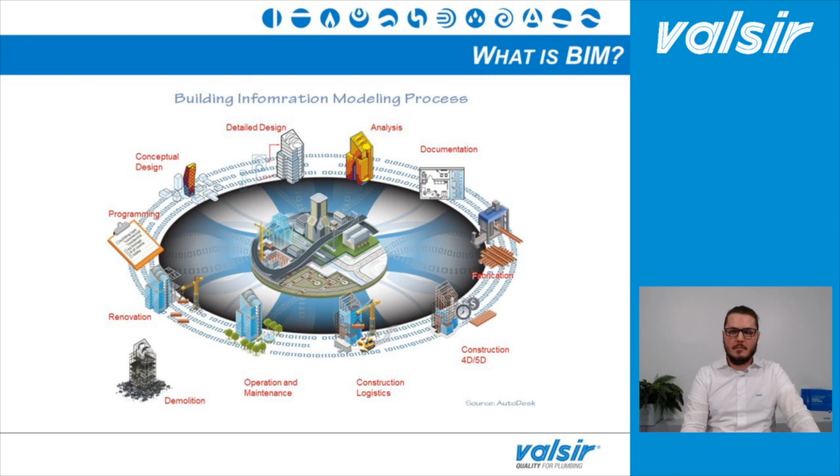By following the BIM philosophy, you try to improve the synergy amongst all the stakeholders involved in the development of a building. In a traditional way of development, you have different professionals who independently develop their project. For example, the structural engineer develops the structural core of the building, and the MEP designer designs all the systems inside the building. But they don't talk to each other, and this can lead to drawbacks during construction, which can lead to delays and extra costs.

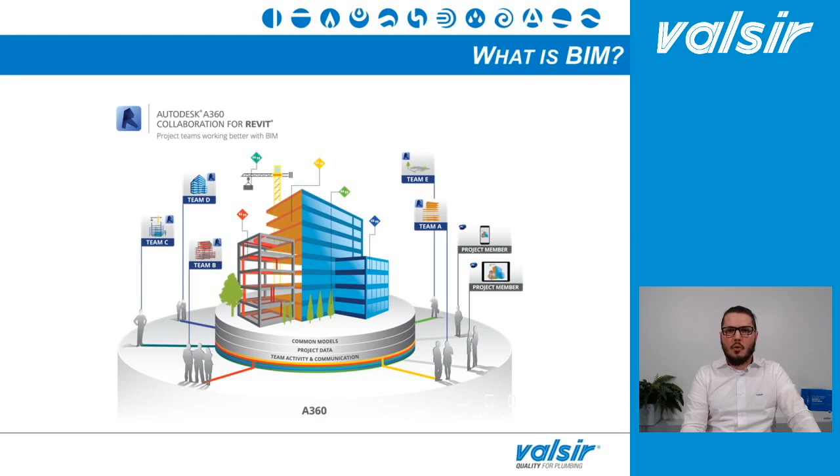But by using a BIM approach, you try to improve the coordination amongst all the stakeholders, and by doing so, you cut off the delays and extra costs, and you can save money.

If we look at both images now, you can see that the entire building is now the center of our development. In a traditional way, we mainly have two-dimensional plan views made by different professionals for different systems - a plan view for the structural engineer, then a plan view for the MEP designer, made mainly with vectorial software, such as AutoCAD from Autodesk. If you overlap all those plan views, you get an imaginary result of your building.

But by using the BIM approach, we now use different, parametric software that allow us to have, in the end, a real digital avatar of our building. And in order to create this digital avatar, you need models to insert into your project. This is where companies like Valsir come in, helping designers by providing these models.

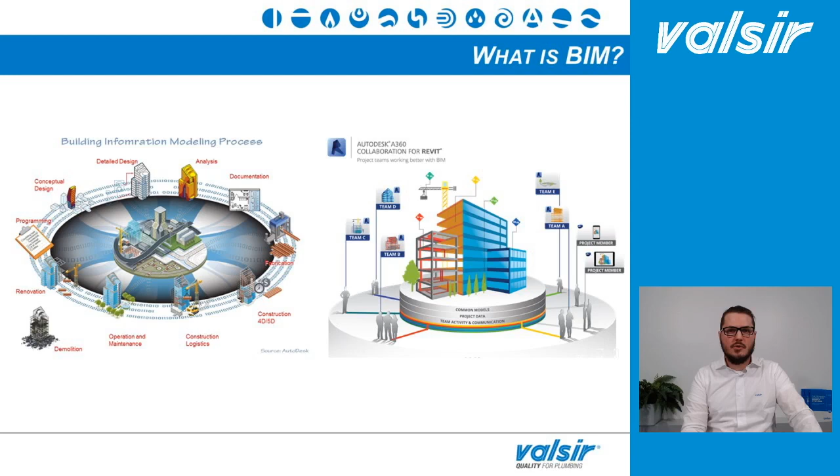So let's take a look at all of Valsir's BIM solutions. Going to our website, www.valsir.it/software, you will find all our solutions for BIM. For those already familiar with BIM, you can see that most of our solutions are mainly for Revit. Revit is a software from Autodesk, and it is the most used software in our market share for MEP designing. So we decided to develop most of our solutions for this software.

As you can see, we have another solution for another software, Plancal Nova, because we always keep an eye open on market requests. The first solution is an entire range of families for Revit. We have all our product families in Revit for your project, and we started developing those families in 2014. We develop all the models internally in order to achieve two main advantages: first, to provide clients a fast and quick response for any question or problem using our models, and second, to keep all our products in the catalog up to date.

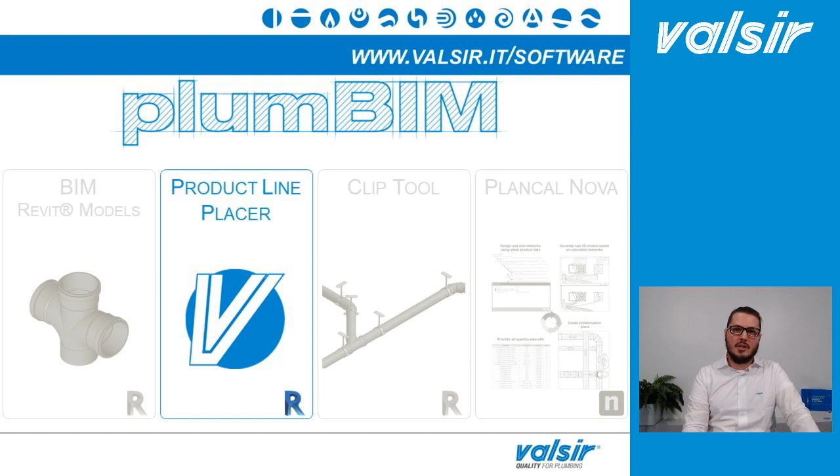The second solution we have is a tool for Revit called Product Line Placer. It allows you to insert directly inside your project all the system and loadable families without loading them one by one as you would in a traditional way. This will be a topic of the next webinar about Valsir solutions for BIM, hosted next week by my colleague Engineer Donati.

The third solution is another tool for Revit called Clip Tool. We decided to develop this solution because, thanks to feedback from users of our families, we found out that in their designs, for example for a waste system, all the pipes were flying inside the project. That's because the bracketing system was missing, and adding a clip around the pipe is a really hard and time-consuming process. So to help them, we decided to develop this tool that automatically inserts all the bracketing system inside your project. This tool will also be a topic of the next webinar, so stay tuned if you're interested.

The last solution, as already mentioned, is for another software, Plancal Nova, where we developed an entire range of families for this software. Unfortunately, this won't be a topic of this series of webinars, so if you have any questions about it, feel free to contact us and we'll be glad to answer and provide all the information you need.

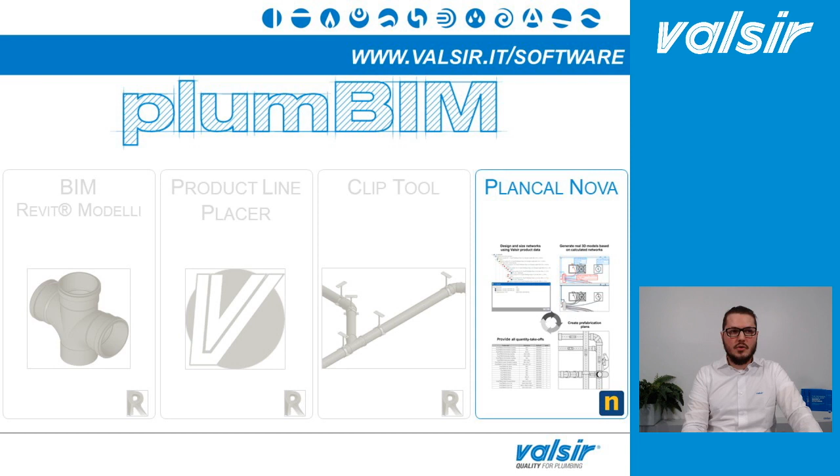So now let's focus on the first solution, our Revit models. We mentioned that in order to create the digital avatar of the building, we need models, and the same goes for MEP designers to design their systems. They have two different solutions: they can use the standard models developed by the software house, or they can use Valsir models. Let's do a quick comparison between those two categories.

If we look at ease of use, both get a positive evaluation. With standard models, you can create an entire full system without any problem, because the software house developed their models to give you a full user experience with their software. We developed our models taking the positive aspects of standard models to provide you the same user experience, so with Valsir models you can also create a complete system without any problem.

But if we go deeper into the comparison, we can see that with a standard model, there's no matching with a real item, because it's a digital item developed by the software house just to give you a complete user experience—you don't have anything more. But with our Valsir models, you have a matching with a real item, because you're sure that if you insert a product from our families, you're inserting a real product that you'll find on the market. This allows you to have a complete list of all the products you've inserted.

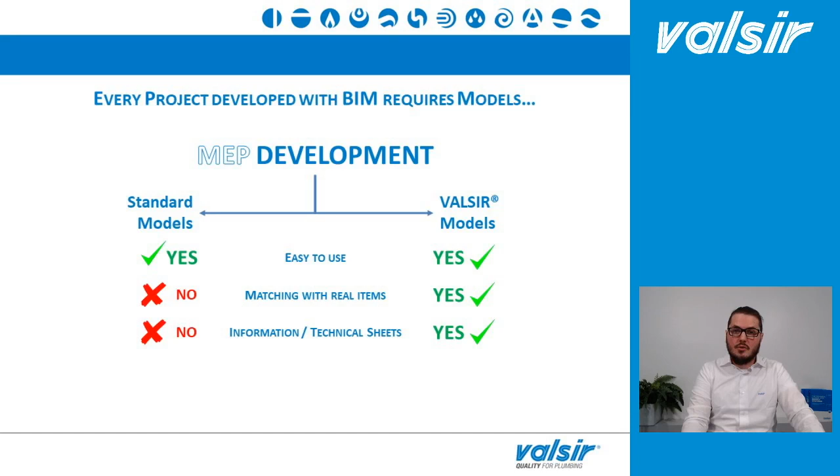And since we're using a real item, we also have a lot of different technical and commercial information attached. So you have a sort of full technical sheet for all the products you've inserted in your project—things you don't have with a standard model, because it's just a digital item developed by the software house.

Using a real product also allows you to do what's called clash detection. By using a standard model, you're not sure about the real dimensions of the actual item that will be installed on site during the construction phase. But with Valsir models, you're sure that the geometry and dimensions of the digital item match the real product, so you can also check for any interference between the system and the main structure, for example, and avoid delays in solving this kind of problem.

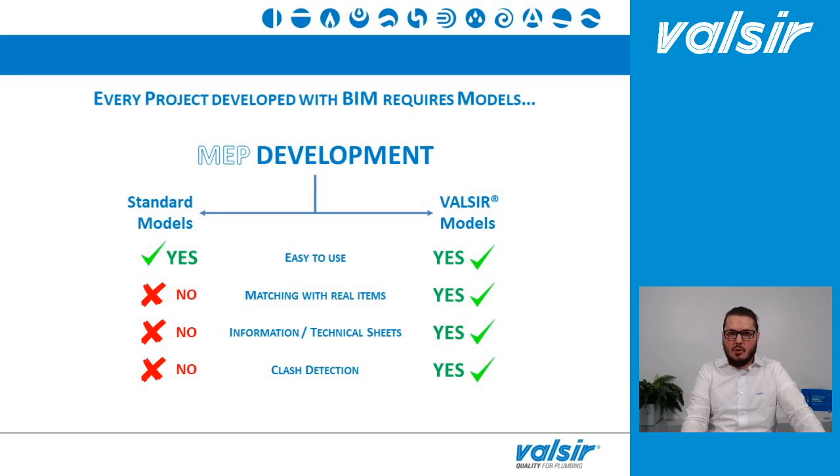Now let's go deeper into which kind of information you'll find in our models.

As already mentioned, we have a really high level of detail in the real geometry of the item, so you can be sure the dimensions of the digital item match the real product. We also have a list of information, because BIM means Building Information Modeling. We have commercial information such as the commercial name and product code, but also technical information like the field of application or the noise level you can achieve, for example here looking at a wastewater fitting, or the limit of pressure and temperature, and so on.

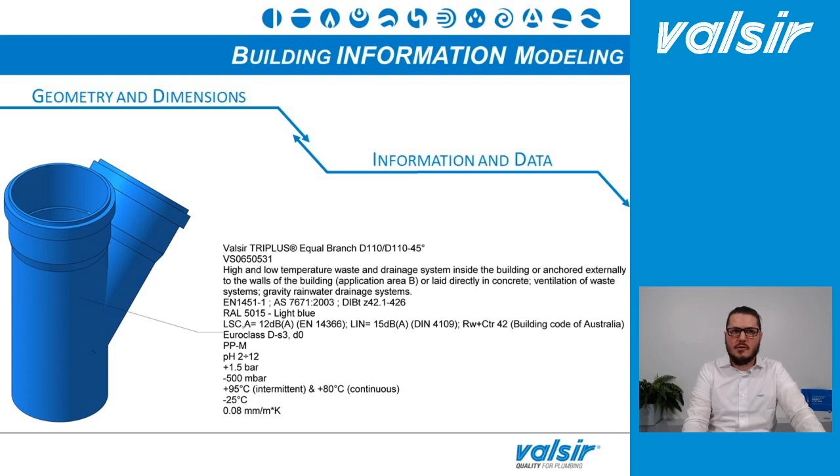But it's not only that. BIM means Building Information Modeling, so more information is better. If we look at this hydro fitting, which is for water supply, we have the same information as before, but if you look at the last two rows, you find additional information.

In this case, it's information about the tools needed to install this particular fitting. Following a BIM approach, we have to consider the entire life cycle of the building, including the maintenance phase. Once you have the as-built of your construction, you can give the digital avatar of your building to the maintenance manager, who can check the products in the system to know which tools are required to maintain the building.

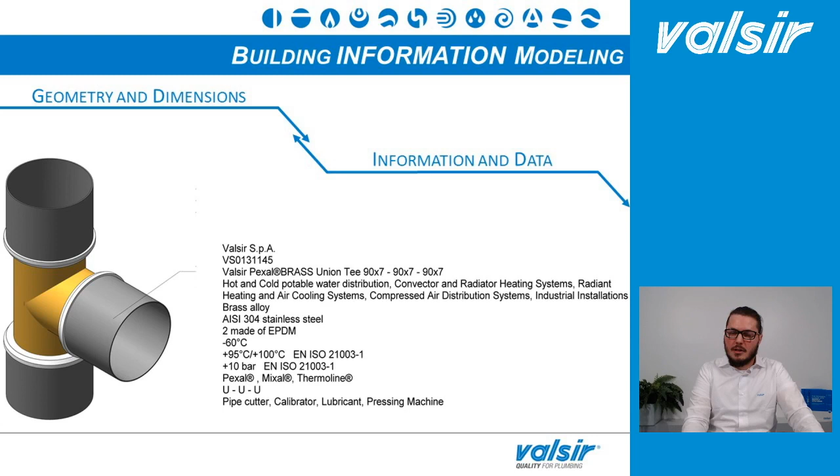For example, for the flushing cistern we can change the depth of installation, the length and angle of the waste pipe, the length of the legs of the flushing cistern, and so on.

Inside our families we also have a lot of presettings to optimize it, such as preset schedules of materials, preset routing configurations, and so on.

We are now going to see a couple of videos about this topic. The first one is about our editable parameters. We are inside the Revit environment, with three different views: a plan view, a sectional view, and a 3D view.

We've just inserted our flushing cistern, and on the right you can see all the different properties and editable parameters of this fitting. Now we're changing the host distance input, which is the depth of installation. This way we can optimize the thickness of our wall, which is important because you can adjust it according to the real installation.

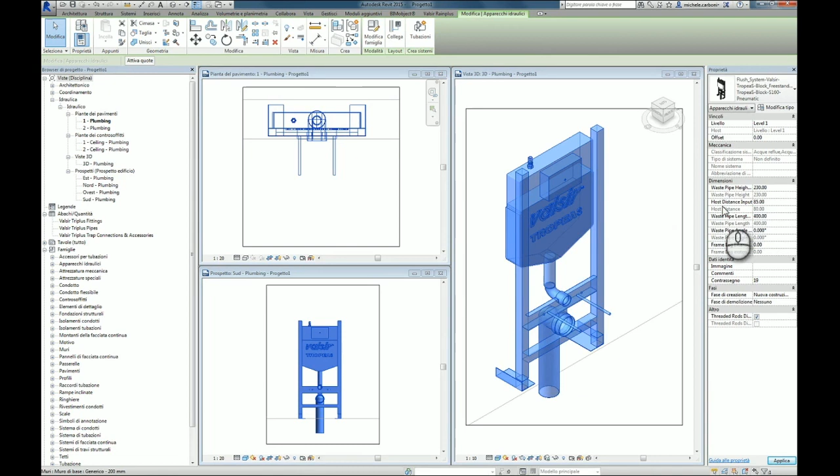If you think about a particular installation of a flushing cistern, like a back-to-back toilet, it's important to know how to optimize the model to also optimize the thickness of the wall. Similarly, we can change the angle and length of the waste pipe, checking if the waste system will fit inside the slab. Another thing we can change is the length of the legs to reach, for example, the structural slab in our project.

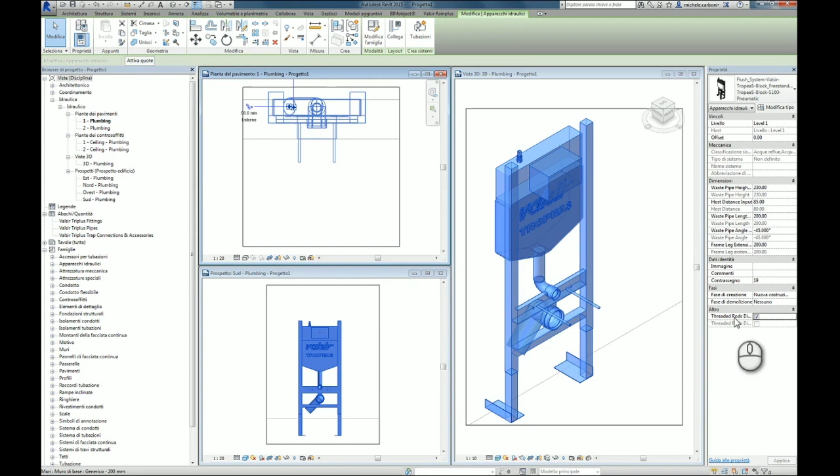When we finish optimizing the model, with just a couple of clicks we can start designing the waste system, drawing the pipes. As you can see, by drawing the pipes we are adding fittings and pipes to our project.

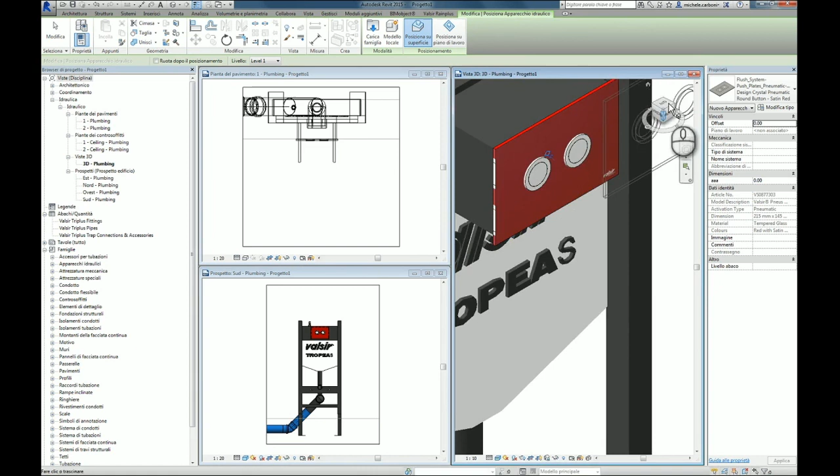Another thing we can do is add accessories, for example adding the pushing plate to our flushing system. We have a complete catalog of pushing plates, including design pushing plates. This way you can also add an aesthetic touch to your project, useful for interior designers who need to provide a render of the bathroom to their clients.

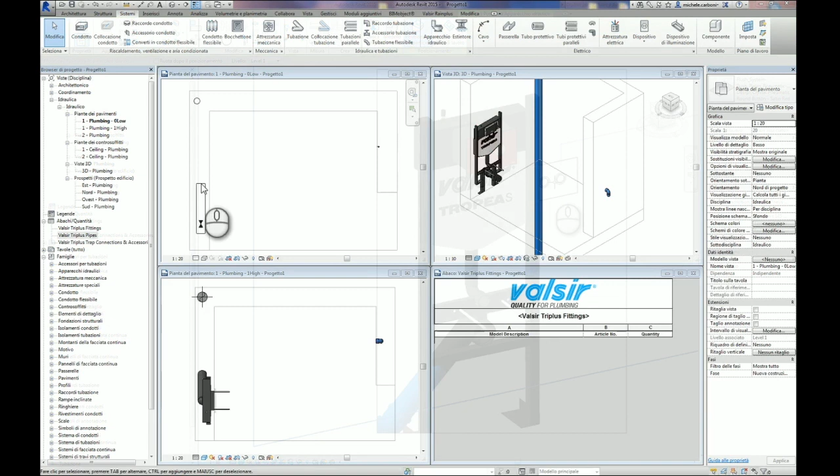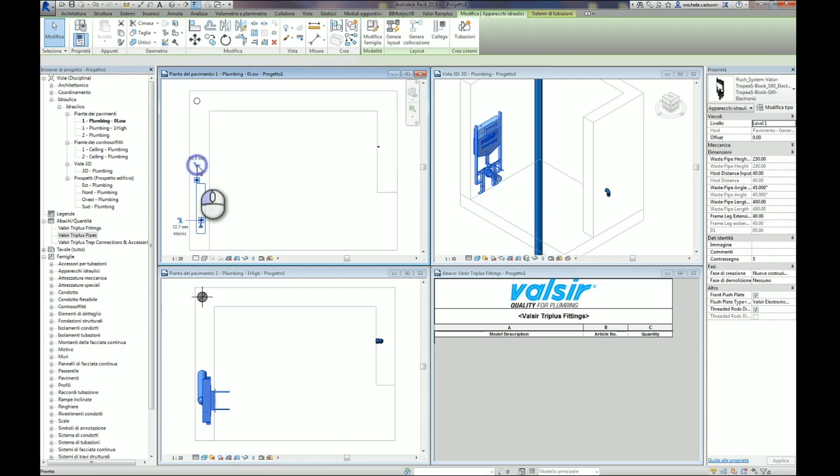Speaking about the setting, we are now going to see another video. We are still in the Revit environment. We have 4 views this time: a plan view schematic, a plan view detailed, a 3D view, and in the bottom right a 4th view, which is the schedule of the material, because in Revit the list of materials is also a view.

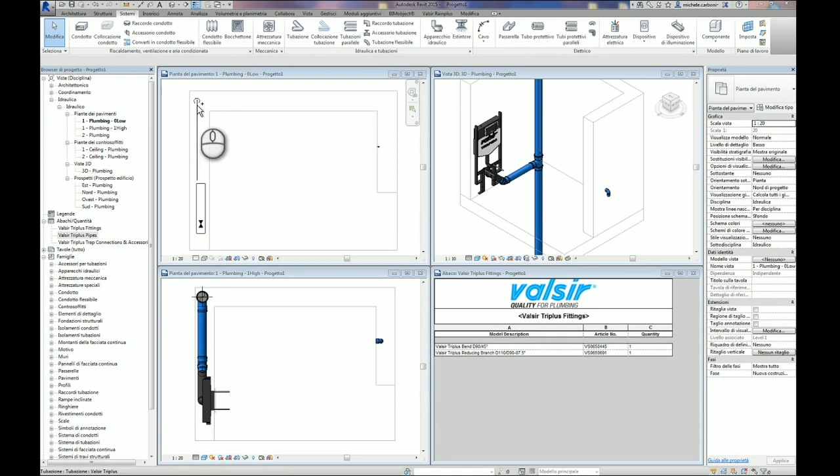So now we will see that simply by drawing a 2-dimensional line in the schematic view, we are adding pipes and fittings to our project. This is thanks to the routing preferences that we have already preset in our families to optimize the way you design your system. Differently from a vectorial software, where drawing a line gives you no information, in a BIM software, a parametric software, by changing parameters, when you draw a line you are drawing a real item, a real product.

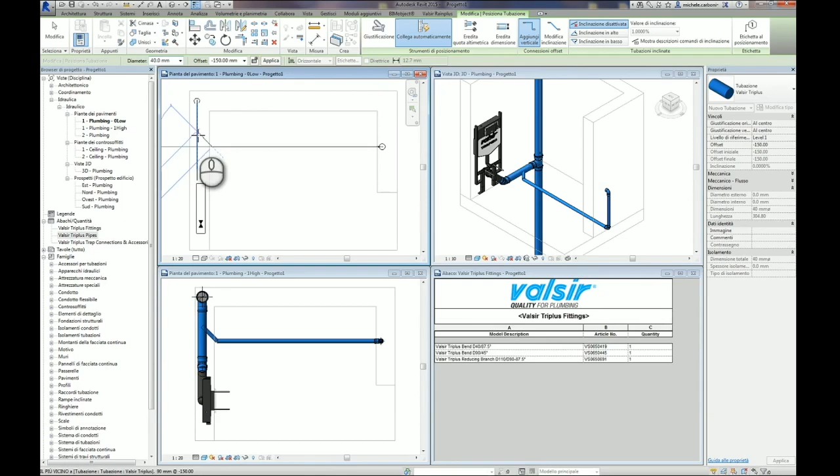We are doing the same now from the spigot bend. As you can see, by simply drawing 2 lines, we are drawing fittings, pipes, and everything. As you can see, while we were drawing the pipes, the schedule of the material updated with all the items in our project. So with just a couple of clicks, we are adding real items, real products.

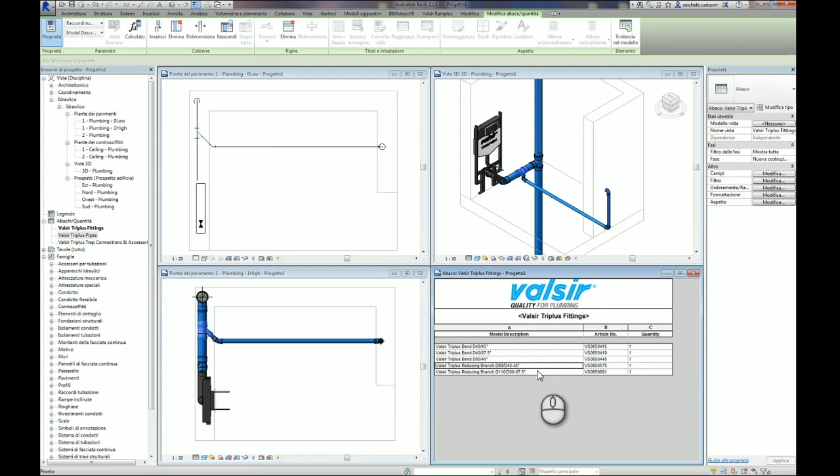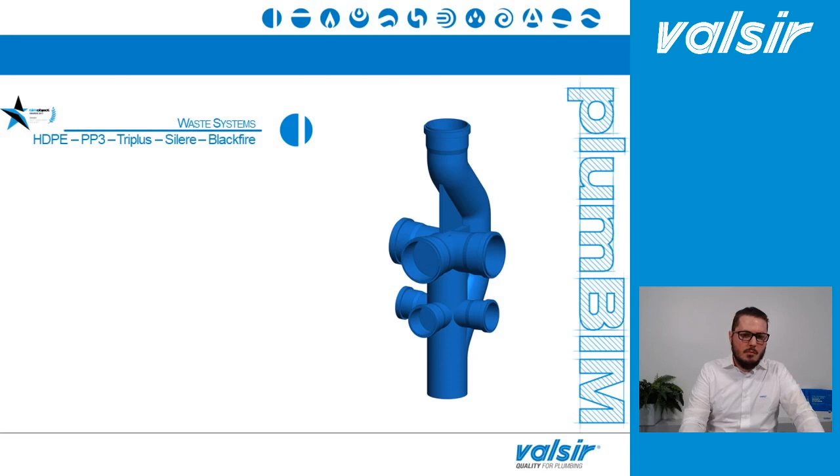But what do we have available for you in Revit? We have our entire range of waste systems: our HDPE pipe, weldable HDPE pipe, and also all our push-fit pipes for acoustic application. And we have also the new entry, the Blackfire, which is our pipe for fire application.

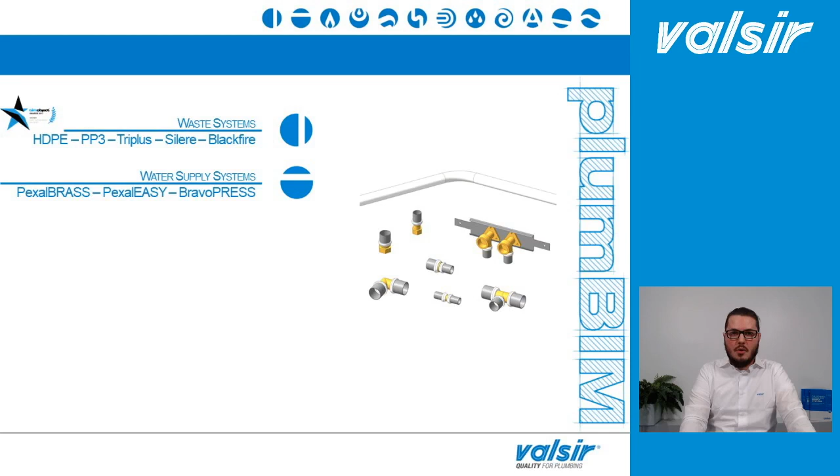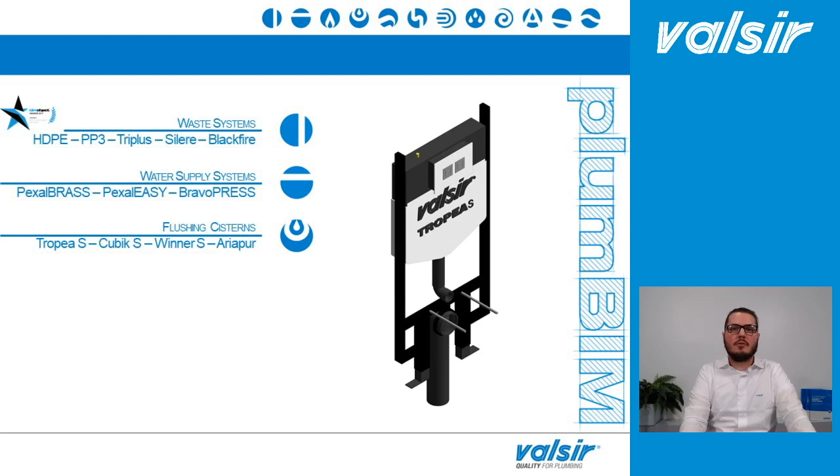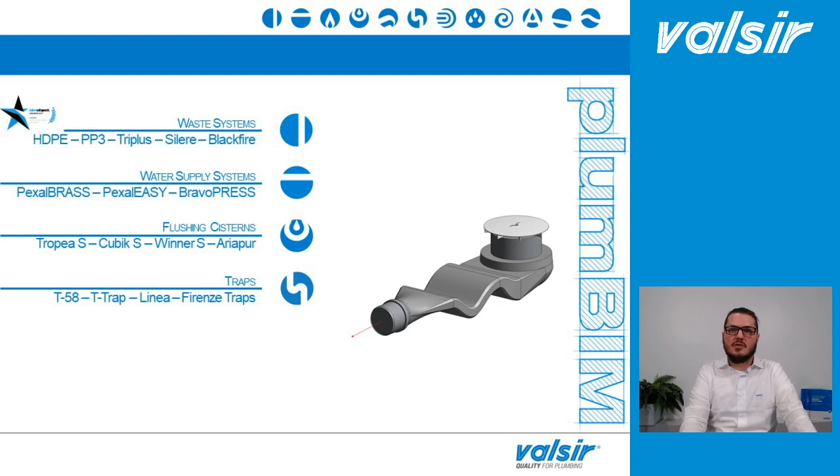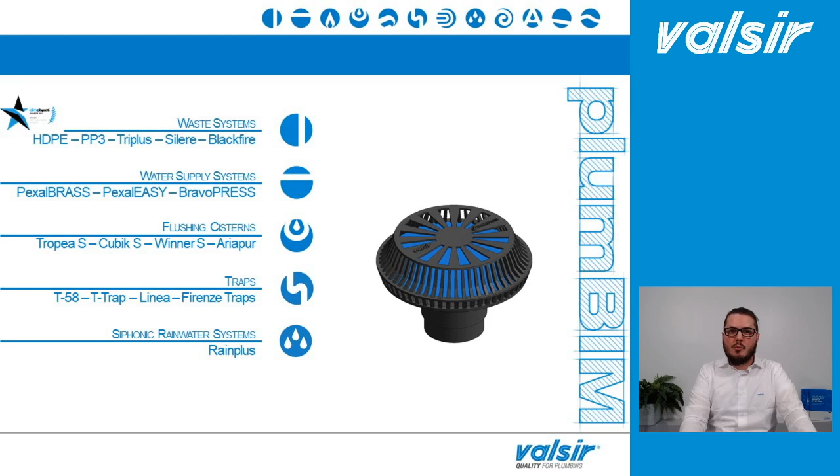Then we have a complete range of families of traps, standard traps for standard application, or even design traps, the same as for the flushing plates, to provide interior designers the solution for their render. Then we have all the families of our siphonic drainage for rainwater, so we have all the families to provide you with the Revit models of the entire system.

And then finally we have a complete range of mounting frames for the bathroom. So we have frames for the sanitary, for the wash basin, for the bidet, and so on. And news: we are finishing the development of all our families for the heat recovery and ventilation system, so in the next months I hope we will be able to provide this solution for you.

Where can you find all these models? Going on our website www.valsir.it/software, you can see all our solutions and reach the page with our Revit families, or you can use the direct link valsir.it/BIM. Here you will see all our products divided by product line, and by clicking on one of them it will open a pop-up with all the files that you can download.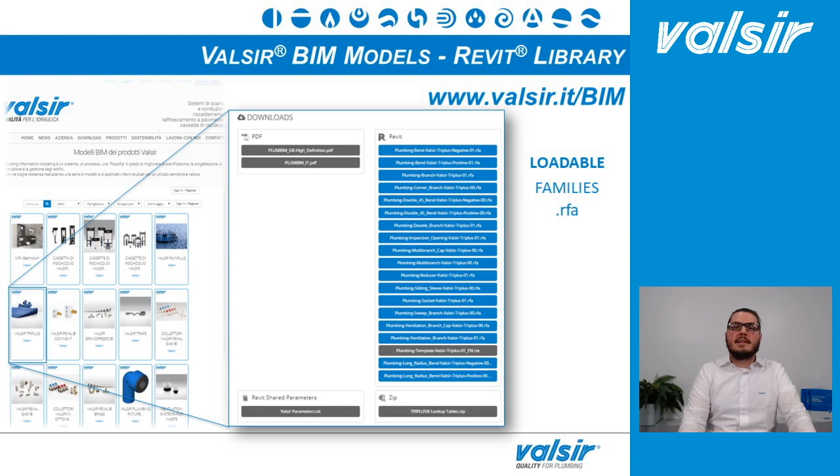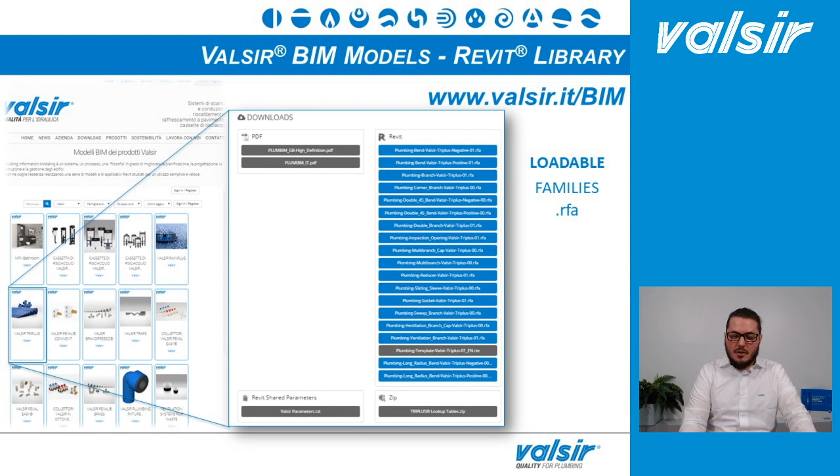The loadable families are, for example, accessories and fittings for the system, those that you have to load one by one inside your project. Then we have the template file. In the template file you will find all the system families, like the pipes, and the settings. With settings we mean the optimization of the setting for drawing the system, like the routing preferences, but also schedules of materials. Because creating a schedule of material is a really long and time-consuming process, especially if you want to create one for the pipes, inside our template you will find three different schedules: one for the pipes, one for the fittings, and one for the accessories.